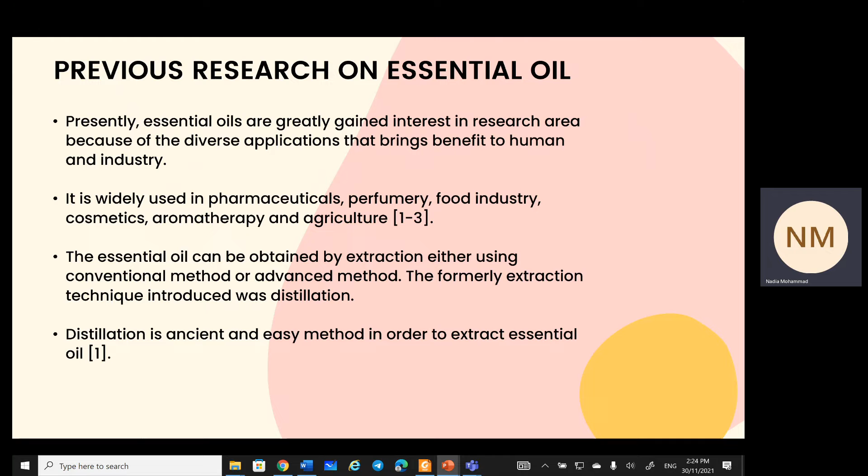Distillation is an ancient and easy method to extract essential oil. Therefore, distillation is categorized as a conventional extraction that can be accomplished by using hydro or steam distillation. Okay, this is the previous research on temperature control effort.

In extracting essential oils, there are parameters that have to be considered which may affect the yield and also the quality of the pure essential oil. Those parameters are pressure, distillation time, composition of chemical substance, and the size of the raw material. However, the temperature is the most critical parameter that will affect the quality of oils.

The temperature is difficult to handle and control since it exhibits non-linear behavior, and moreover, mostly the extraction process was operated under little or no supervision to monitor or control the temperature during the extraction. Therefore, in this study, monitoring temperature control is important in extraction and it is chosen as the process variable for the proposed research.

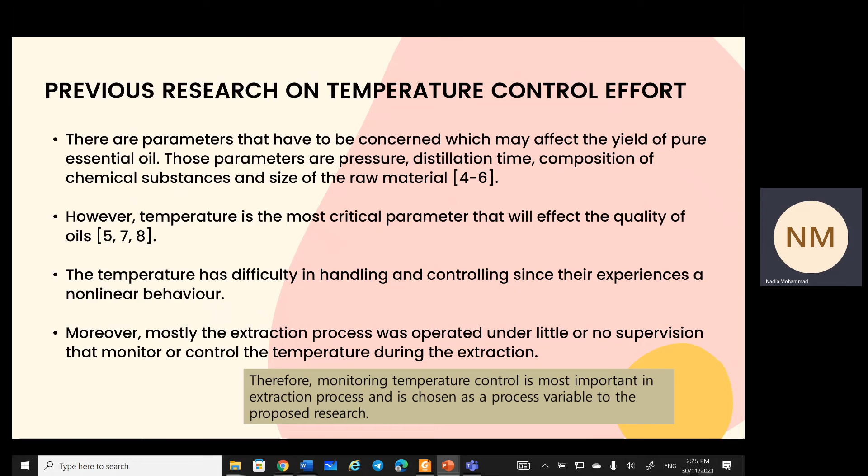Okay, this is the previous research on control strategy. In this study, we are focusing on the PID controller and fuzzy logic controller. The PID controller is of most interest and has sustained its popularity because of its simplicity and understandable control action. But unfortunately, PID control has some drawbacks, being unable to control processes with large constraints.

Therefore, advanced controllers have been applied to enhance the conventional controller, like the fuzzy logic controller, self-tuning fuzzy PID, model predictive control, and other advanced control techniques. So, the fuzzy logic controller is an intelligent control strategy that applies linguistic rules, with advantages where it does not require a mathematical model structure and can handle non-linear processes.

Nevertheless, the fuzzy logic controller has some drawbacks where the tuning process is done manually based on the trial and error method, and eventually it is time consuming. Therefore, self-tuning fuzzy PID can further simplify this problem.

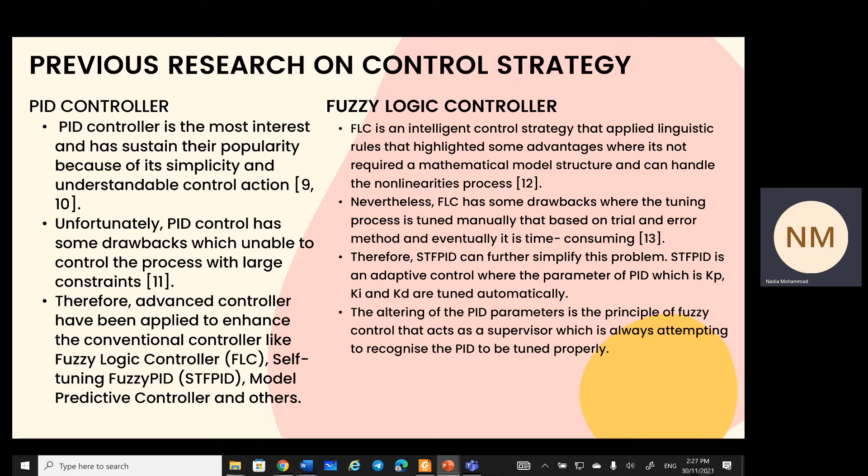Self-tuning fuzzy PID is an adaptive control where the parameters of PID, which are Kp, Ki, and Kd, are tuned automatically. The altering of the PID parameters is the principle of fuzzy control that acts as a supervisor, which is always attempting to recognize the PID to be tuned properly.

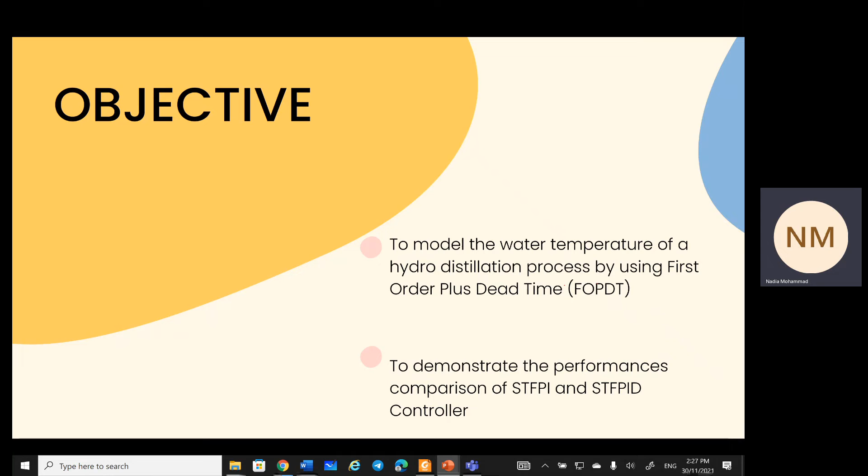So in this study, the objective is to model the water temperature of a hydrodistillation process by using the first order plus dead time FOPDT model, and to demonstrate the performance comparison of self-tuning fuzzy PI and also self-tuning fuzzy PID controller.

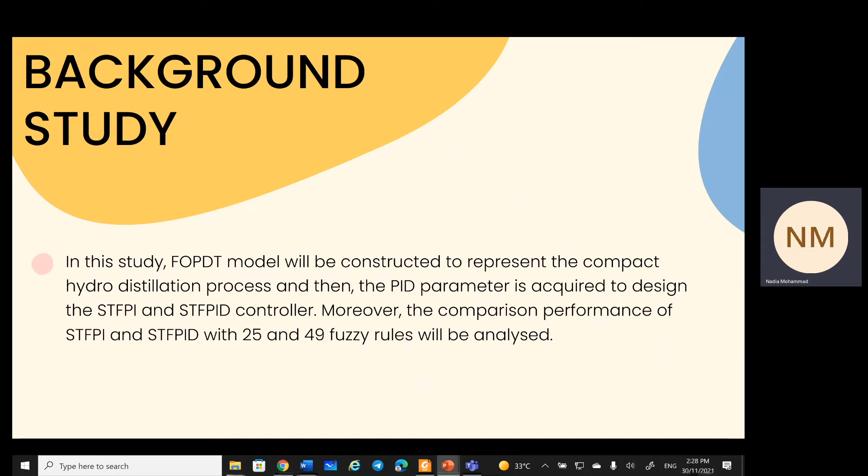Okay, in the background of this study, an FOPDT model will be constructed to represent the compact hydrodistillation process, and then the PID parameters are acquired to design the self-tuning fuzzy PI and self-tuning fuzzy PID controller. Moreover, the comparison of performance of STF-PI and STF-PID with 25 and 49 fuzzy rules will be analyzed. So this is the methodology involved in this study.

So the first step is doing a step test by an open loop experiment, and then constructing the FOPDT model, and then we implement the PID controller and fuzzy logic, and then lastly evaluate the performance based on transient response.

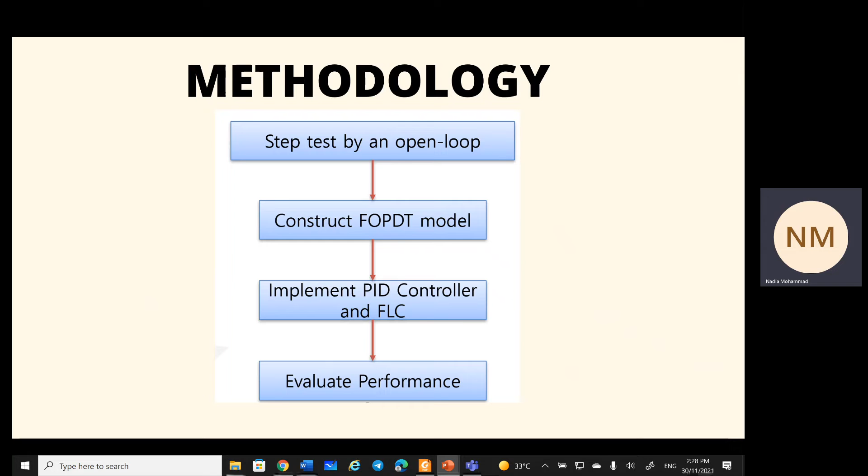From this open loop experiment, the FOPDT model is developed by using the process reaction curve. The process reaction curve is used to obtain the FOPDT model by using the 2-point method, at 28% and also 63%. From the process reaction curve, the time constant, time delay, and gain have been obtained, and the FOPDT model has been obtained.

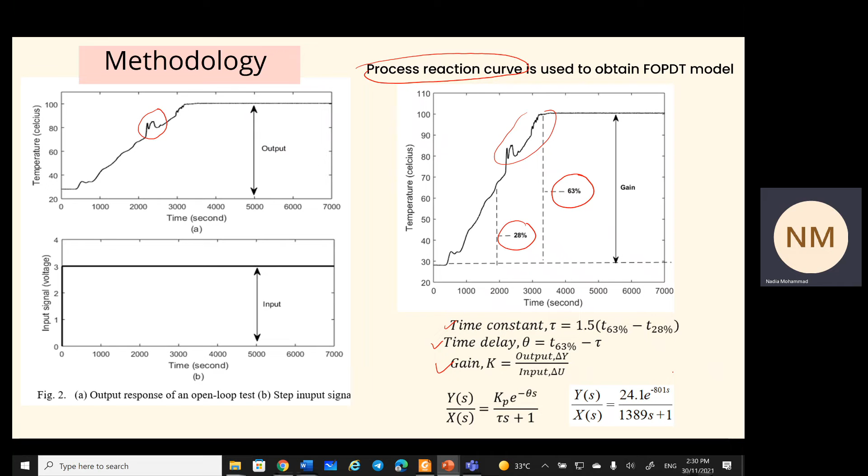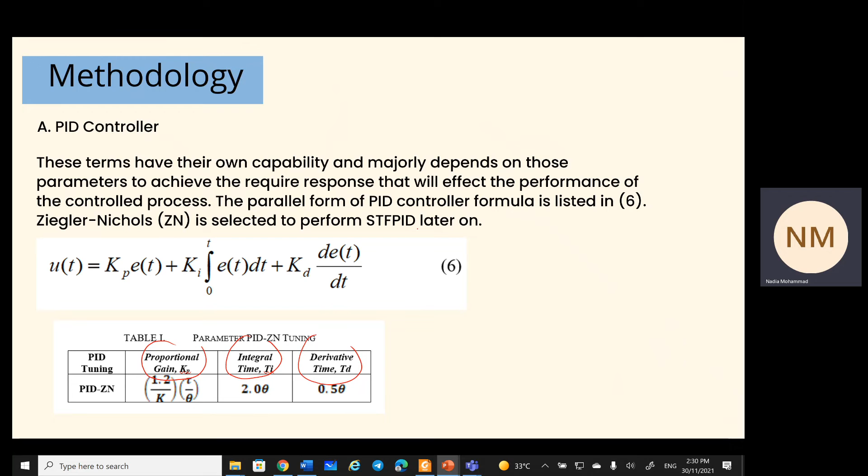In this study, the parallel form of PID controller has been used, listed in equation 6, and Ziegler-Nichols is selected to perform STFPID and also STFPI later on.

Okay, this one is the self-tuning fuzzy PID controller. In designing the STF PID, there are 2 inputs involved, which are error and also derivative of error, whereas the outputs are KP, KI, and also KD. This controller is attempting to tune each parameter of the PID. With the combination of this controller, fuzzy control will act as a supervisor, meaning that it is always attempting to recognize the PID in order to tune the parameters properly.

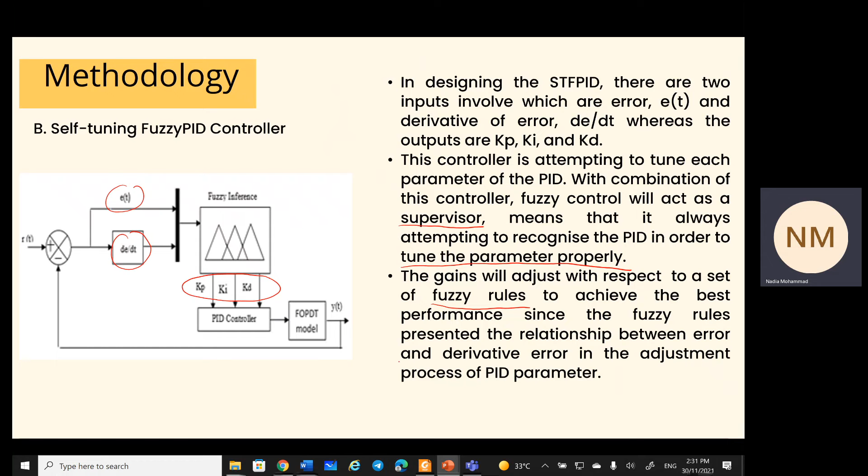The gain will adjust with respect to a set of fuzzy rules to achieve the best performance, since the fuzzy rules present the relationship between error and the derivative error in the adjustment process of the PID parameters. As you can see here, figure 5 and figure 6 depict the 7 times 7 and 5 times 5 membership functions of the input fuzzy set for the error, respectively. Here the range is set to -100 to 100 as it presents the full scale of the water temperature.

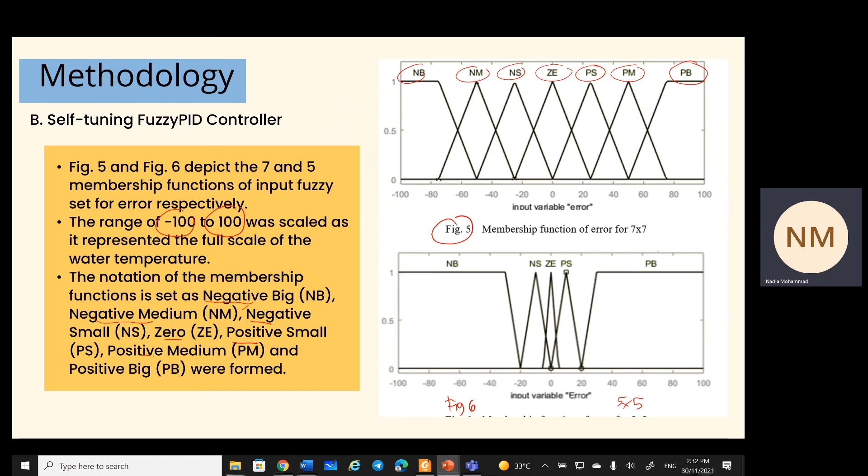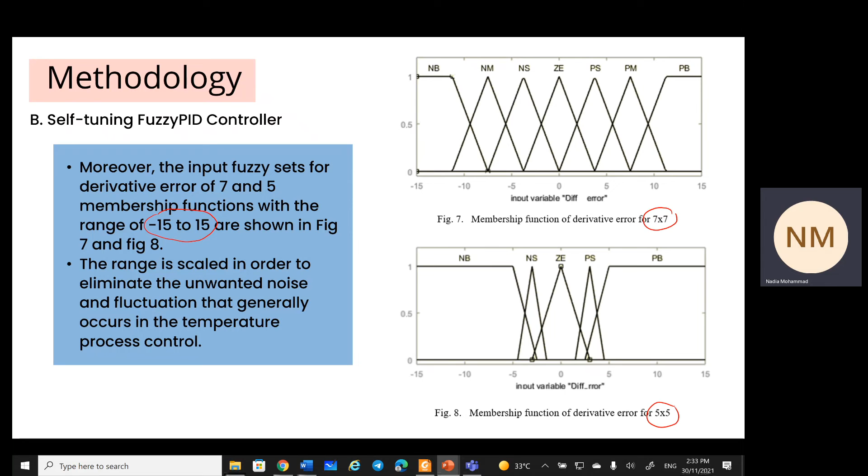So the notation of the membership function, as you can see here, NB, NM, NS, ZE, PS, PM, PB refers to negative big, negative medium, negative small, zero, positive small, positive medium, positive big. And the same goes for the derivative error for 7 times 7 and 5 times 5. The range is -15 to 15 because it is used to eliminate the unwanted noise and fluctuation that generally occur in temperature process control.

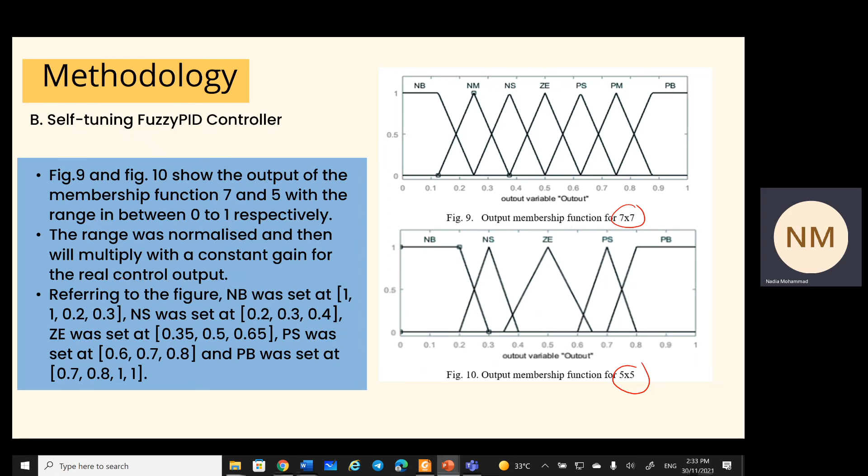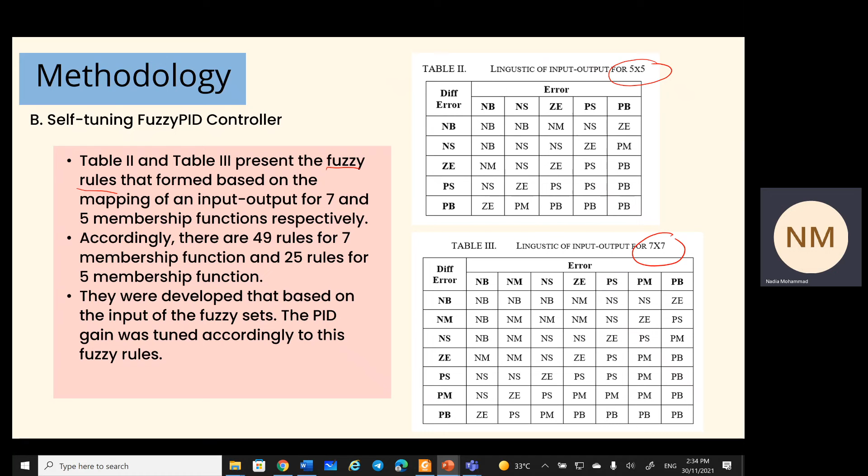This is for the output membership function, for 7 times 7 and 5 times 5. The range was normalized and then multiplied with a constant gain for the real control output. Next is the table for fuzzy rules, based on the mapping of input and output of the membership functions respectively. Accordingly, there are 49 rules for 7 times 7 and 25 rules for 5 membership functions. They were developed based on the input of the fuzzy set, and the PID gain was tuned according to these fuzzy rules.

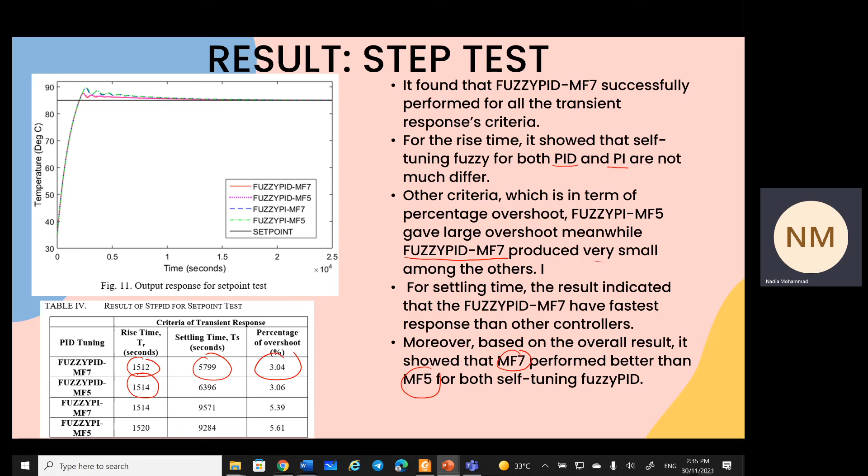Another criterion is percentage overshoot. Fuzzy PI membership function 5 gives large overshoot. Meanwhile, fuzzy PID membership function 7 produces very small overshoot among the other controllers. For settling time, the result indicates that fuzzy PID membership function has faster response than other controllers. So overall, membership function 7 performs better than membership function 5 for self-tuning fuzzy PID.

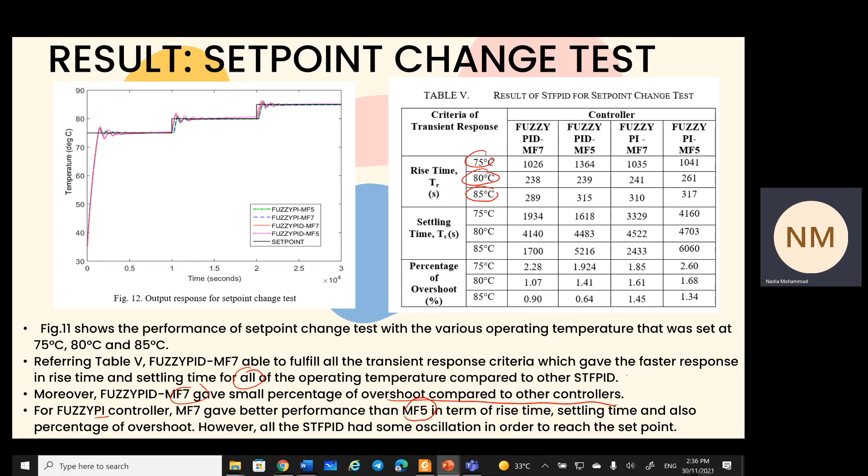For the fuzzy PI controller, membership function 7 gives better performance than membership function 5 in terms of rise time, settling time, and percentage overshoot. However, all the self-tuning fuzzy PID had some oscillation in order to reach the set point. The last result is the load disturbance test. It has been done to test the potential of each controller to follow the set point, and the recovery time indicates which controller managed to reach the set point after experiencing the load disturbance.

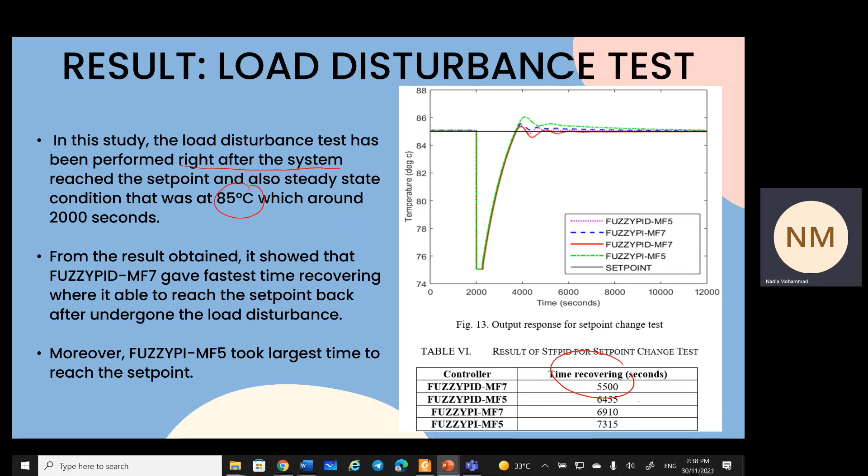As you can see here, the load disturbance was performed right after the system reached the set point and steady state condition at 85 degrees Celsius, at around 2000 seconds. From the result obtained, the fuzzy PID membership function 7 was able to reach the set point back after undergoing the load disturbance. Moreover, fuzzy PI membership function 5 took the largest time to reach the set point.

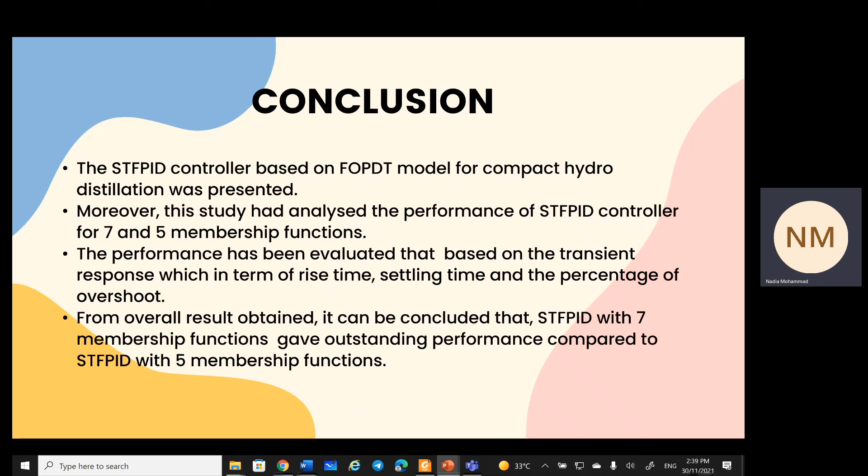For the conclusion, the fuzzy PID controller based on the FOPDT model for compact hydro distillation was presented, and this study analyzed the performance of self-tuning fuzzy PID controller for 7 and 5 membership functions, evaluated based on transient response: rise time, settling time, and percentage overshoot. It can be concluded that self-tuning fuzzy PID with 7 membership functions gives outstanding performance compared to STF PID with 5, and the same goes for self-tuning fuzzy PI with 7 membership functions compared to 5.